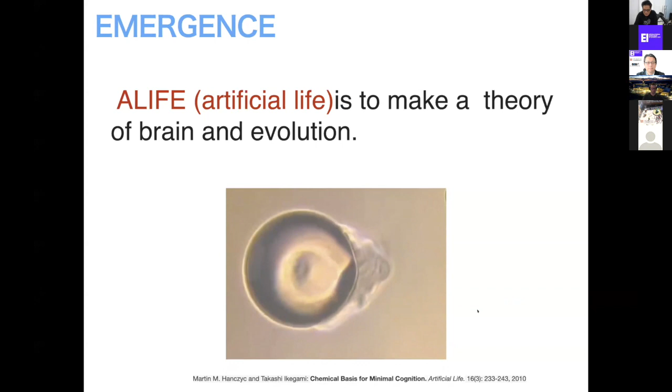I did this about 10 years ago, but then Rodney Brooks wrote a paper saying these robots and programs never become alive. Yes, I noticed that, so we've been discussing what the problem is. Maybe the complexity we discussed yesterday is still too low, or maybe the computational power isn't good enough, or maybe...

we're just missing the parameters. Maybe there's a right set of parameters and we still have the wrong parameter set. Or maybe the fourth reason is we still miss the fundamental theory of life—that's why you can't make real life from robots or programs. So I want to find the missing piece, and that becomes the mission of artificial life.

This is looking for the 'Brooks juice.' When I invited Brooks to the Conference on Artificial Life in 2018, which I hosted, I asked him, 'Can you discuss the Brooks juice?' This was my little installation, and he came to it and said, 'Oh, what's the Brooks juice?' He didn't know we called it that. But the Brooks juice is something like the last drip of juice, right?

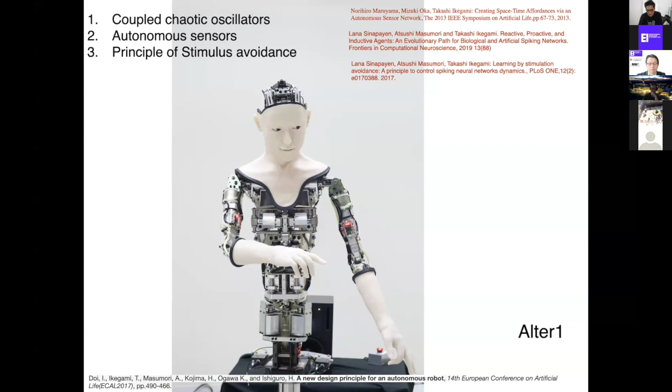In very simple words, the principle of self-stimulus avoidance is: think that this vehicle has a neural network inside, but it's plastic and has Hebbian learning. It's bumping onto the wall, and the stimulus is coming from the wall. But if this robot has some trial and error actions, then by accident it could avoid bumping into the wall, and that gets retained. So it somehow tries to avoid stimulus from the outside. That's the idea of the stimulus avoidance principle. Using this, you can implement very interesting learning capabilities.

If you want to know the details, you can go to these papers.

The system of autonomous sensory network is that there is some artificial chemistry going on. There's input from outside, like temperatures, humidities, sounds, or vibrations. All this kind of stuff comes into this, and then some artificial chemical reactions go on, then it sends it to the other main parts. So this is a complicated sensory network around Alter.

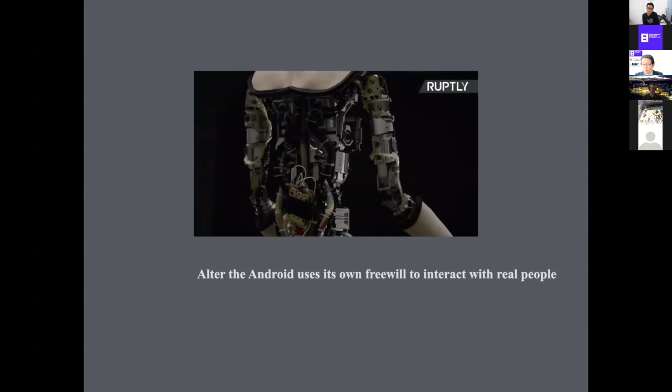Meet Alter the Android, a robot with artificial intelligence so advanced that his creators claim that he has free will. The new humanoid robot interacts with people and moves through an embedded central pattern generator, or CPG, which allows him to express a wide range of different motions. The secret of the CPG is that it's designed to work almost exactly like a human brain. The CPG has its own neural network that mimics human neurons, allowing the robot to create movement patterns of his own, influenced by sensors that detect proximity, temperature, and humidity. The setup isn't quite at the level of creating human-like movement, but it does give the viewer the very strange sensation that this particular robot is somehow alive. Alter the Android is a further demonstration of the progress of artificial intelligence and robotics, and may be similar to the robots that we can expect in the future. If you want to catch Alter before he goes, he is on display for one week at Japan's National Science Museum in Tokyo.

Okay, after 4 years, he's still there. So Alter is in a Museum for Future Science, and I didn't say he has free will—this interviewer says that I said it, but we're struggling to figure out what makes free will, and how it becomes more adaptive to the environment. So the story goes on from here.

Okay, so this prediction and cognitive thing is about what was missing. The first part is emergence—we just used artificial life discipline robotics, so we didn't take into account prediction, representations of a self model, world model, or even planning. Yesterday, Jun Tani, Andy Clark, and other people discussed using the free energy principle, like Carl Friston's and Andy Clark's work, about what cognitive properties are needed to understand cognitive behavior of a robot. To me, I 50% agree with that—only with emergence, it's difficult to get the prediction or planning that people think is cognitive.

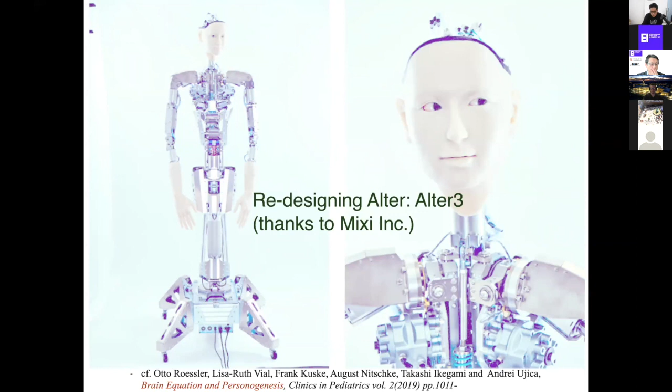So I tried to redesign Alter, which is now called Alter 3, thanks to the Mixi Corporation, with a new design. In 2016 we had Alter 1, with an IR sensor, chaos, and PSA self-avoidance, but we didn't have any self-images, self-awareness, dreaming mode, or memory. Alter 2 and 3, especially Alter 3...

Tonight—Kumia, is it working now? Yes, I can hear you now. Yes, I just got cut off for a couple of seconds.

Oh, really? I see. Yes. It worked now, right? Okay.

The basic architecture of Alter is like this: we have a memory, an automatic mimicry capacity, a self simulator, and spontaneous dynamics. These four ingredients are integrated, and that's the core part of Alter 3. And then there's a mode selector.

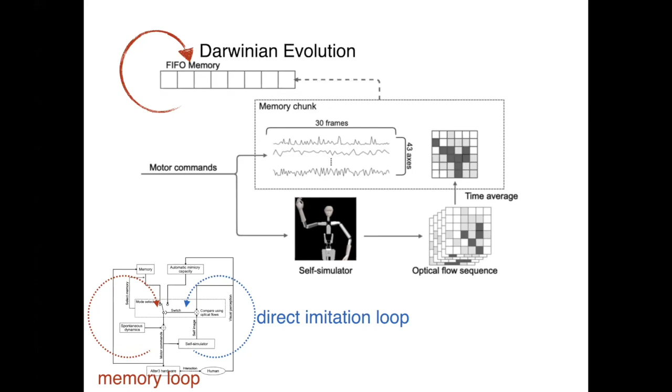So you should remember there's a direct imitation loop and a memory loop. If the direct imitation loop isn't good enough, it goes to the memory loop, and evaluation is done by the optical flow around the human's pose and Alter's pose. Even if nobody is in front of Alter, it still works with the memory, picking up randomly from the memory stores and applying it to his body, playing it and bringing it back. But it's always mutated with crossovers, so the memory structure itself is evolving, and that becomes the source for creating new actions.

So here is an example of how this Alter works.

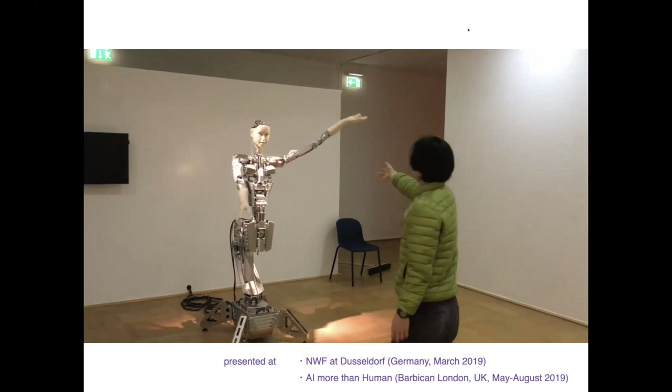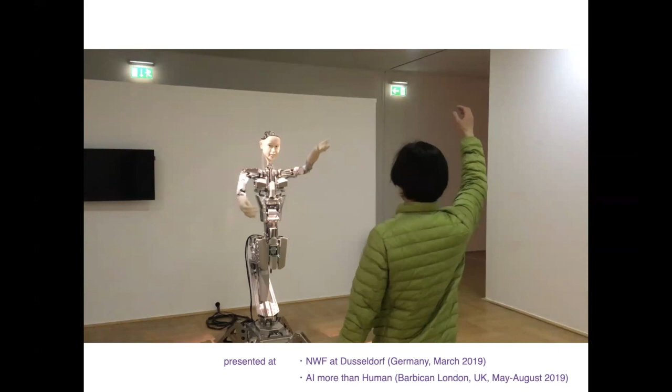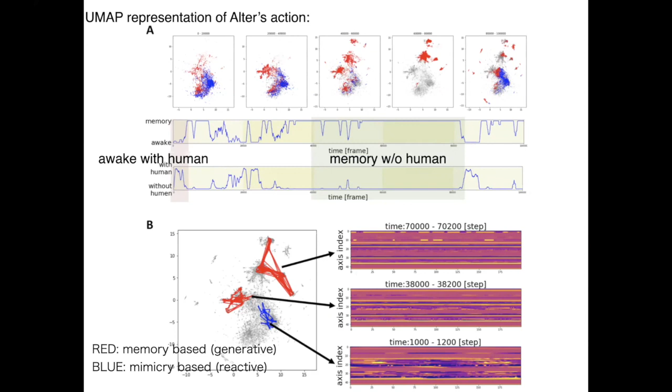So this is a summary of how it works. There are two modes: one is awake with a human, and the other is memory without humans. The blue one is the main part, when there's a human in front of Alter and Alter is just imitating the behavior. But when there's nobody in front of him, there are only the red patterns, because it's always using memory patterns to generate his patterns.

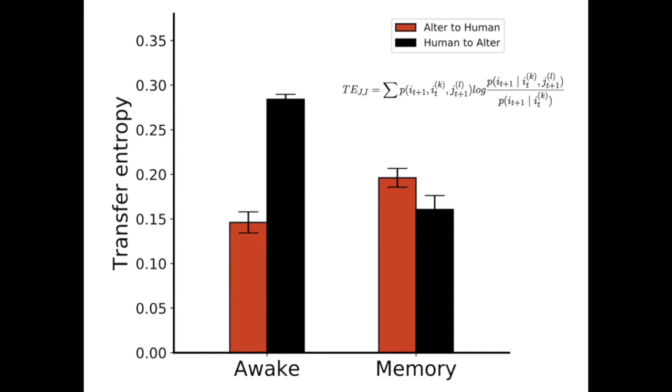One interesting point here is that when the alter is successfully imitating human pose, when we measure the transfer entropy, the information flow is always from human to alter, because the alter is successfully imitating, and human's pose is always upstream of this information flow. But when the alter fails to do this, human tends to help the alter imitate its behavior, so now the alter becomes upstream of the information flow, and the human becomes downstream. So this switching between upstream and downstream of information flow is interesting evidence that this interaction is not one-sided, but both sides.

Now come to the enactive part. This quote is from Francisco Varela, The Embodied Mind, MIT 1991. It's a very famous book, very educative and implicative. It says it should be recalled that embodiment, in our sense, for Merleau-Ponty, encompasses both the body as a lived experiential structure and as the context or milieu of cognitive mechanisms. People put so much stress on the latter part, but I think it is very important to think about the body as a lived experiential structure. That's something I think of in terms of enactiveness.

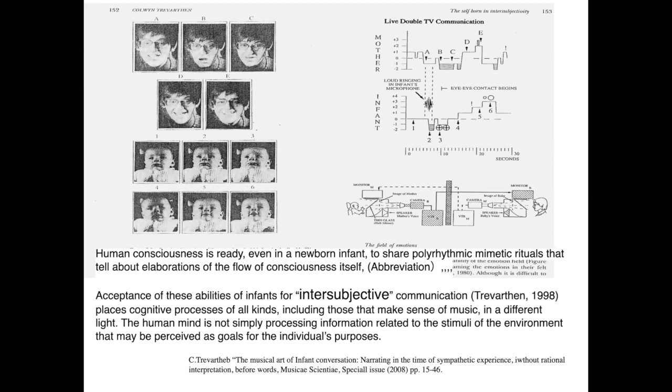The human mind is not simply processing information related to the stimulus of the environment that may be perceived as a goal for individual purposes. So I just want to know: what is the exchange between human and human? What can be exchanged between baby and mother? That was the motivation for me to think about interaction between human and robot, or robot versus robot, or human versus human. We're not just exchanging useful information between us, but there should be something else, right?

Nadel, a very interesting psychologist, said that when kids are playing with each other like a mutual imitation game, a non-affordance way of using objects emerges. So I think it's interesting that imitation is not just imitating others; imitation tries to devise new ways of using tools. People think imitation doesn't go anywhere because it's just copying each other, but actually what happens with human interaction is that imitation can be the source for devising new behaviors and new actions.

Me and Hiro Iizuka at Hokkaido University have been working on this, like how turn-taking behavior emerges from little vehicles interacting with each other. This little small robot devises new behaviors even though they have to take turns, and imitation emerges from it. So this is a connection showing that turn-taking and mutual imitation are related to each other.

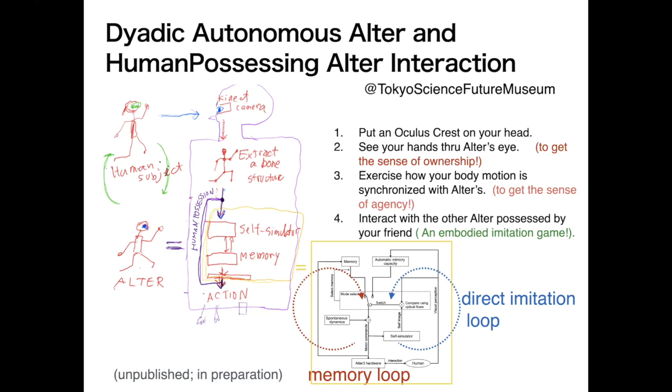This is still unpublished work that we are studying now, so I can show you how it works. This is the autonomous mutual interaction between alter and alter. So this alter is imitating the other, right?

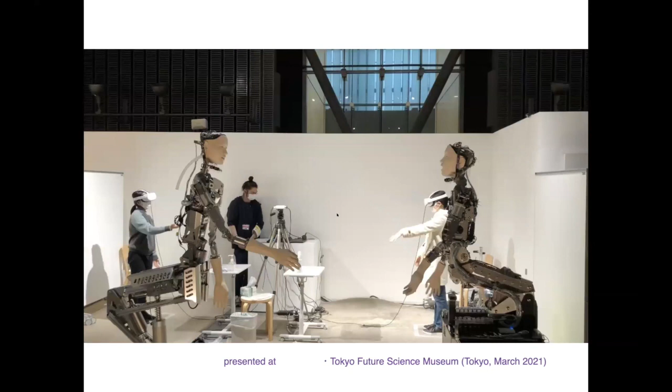Okay, so the next one is a human possessing case. So the people behind this Alter is the possessing Alter.

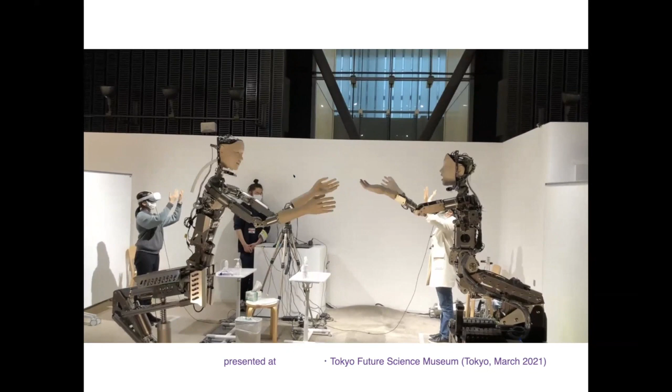So my question is whether you can see the differences between autonomous programs interacting with each other, performing a mutual imitation game, and then also the non-possessing case versus the possessing case.

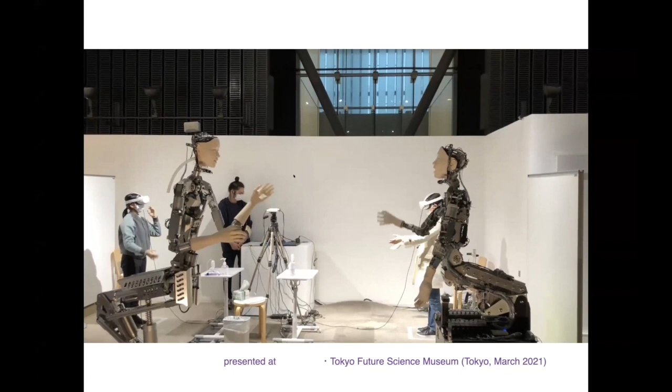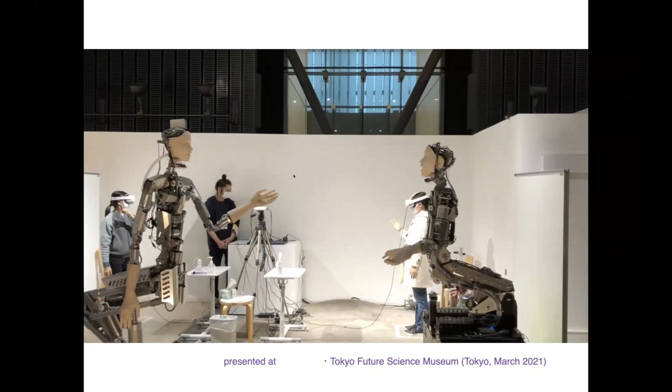So this one is another case of possession. This subject is more doing a discrete action behavior, so it's easy to see whether it is possessed, and then also whether the imitation goes or not.

So there's a little latency between the Alter and the subject, so the behavior is not quite synchronized between the human behavior and the Alter's behavior.

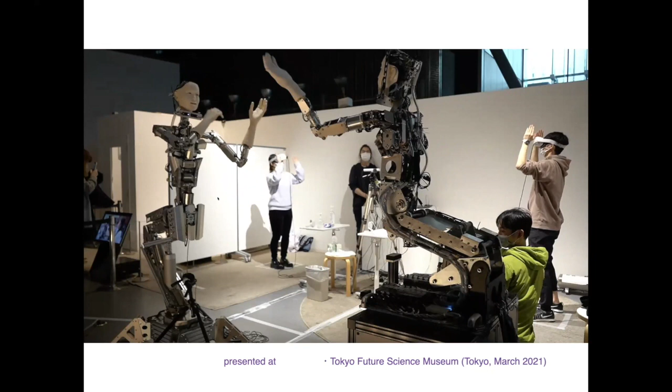And then the free interaction between the Alters is... in this case, this one is not mutual imitation. It's more like a free interaction between two people.

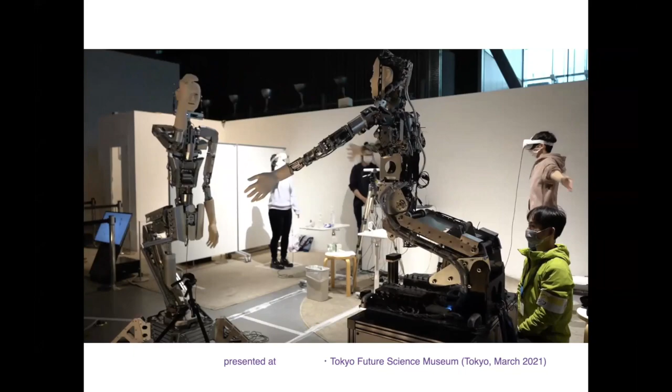So they started to do some imitation. Yeah, so it's quite, I thought, interesting.

First of all, there are differences between autonomous program versus autonomous program, and also the possession case, possessed Alter and possessed Alter interactions. So we just wanted to see this as like a Turing test of the embodied case, right? It's not by language, but the embodied interactions Turing test, so whether you can distinguish between human versus program versus program. This is the autonomous case that still you can see the difference.

There's a turn taking. I mean, when the Alter moves, the other one also moves. So this is very normal.

But when we use a UMAP representation, then it's clear that human possession Alter interactions are different from autonomous program interactions. Well, you can easily say that the program is stupid, so that's why you can easily distinguish, but...

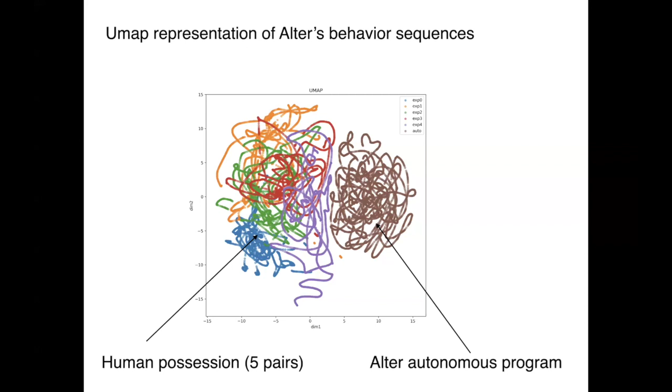And maybe the cause of this symmetry breaking is because Alter 2 and Alter 3 have different body structures, so because of these body structures, the constraint is different. That leads to different behavior even though the program inside each Alter is exactly the same, but still the body makes it different and generates a leader-follower relationship.

So concluding from this experiment, the machine's mind, for the moment, is not generated by an algorithm by itself, it's something different. So I think the mind can be contagious from people through interactions.